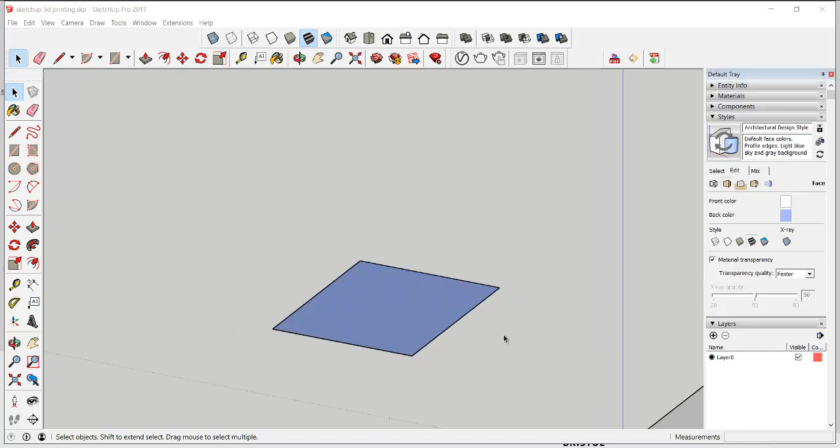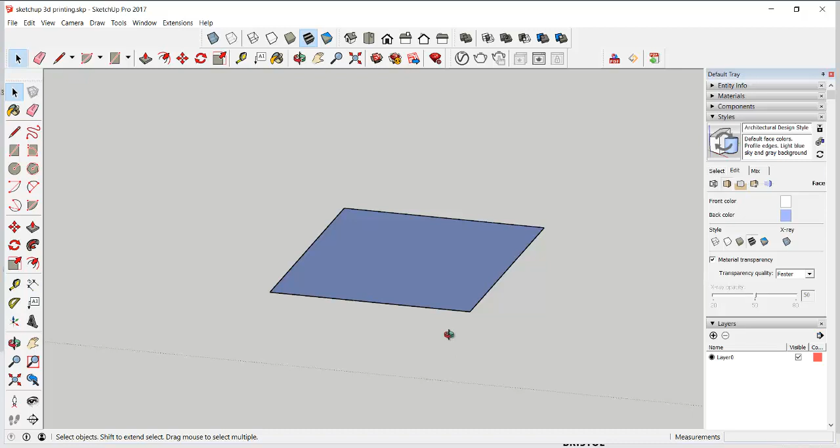One of the first things to realize in SketchUp relating to 3D printing is that surfaces have got two sides. They've got a white side and a grey side. Now, when making a model, it's often easy to get some of the objects white facing outwards, some grey facing outwards. Of course, you can't see this once you've started applying materials. But for 3D printing, it's very important. So one thing I want to show you is how to look for these problems.

So here's the cube, and just to demonstrate, if I delete the face off it, you can see inside, and I've got a slight bluey grey finish. Now I find it very difficult to see the difference between an outside and an inside face when I'm modelling.

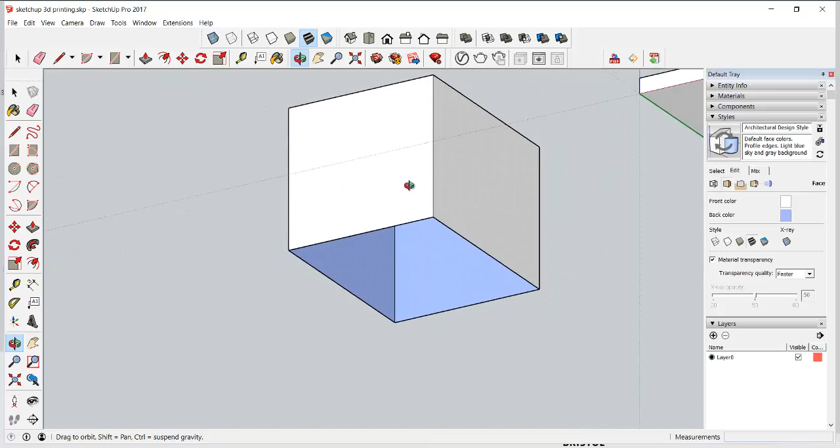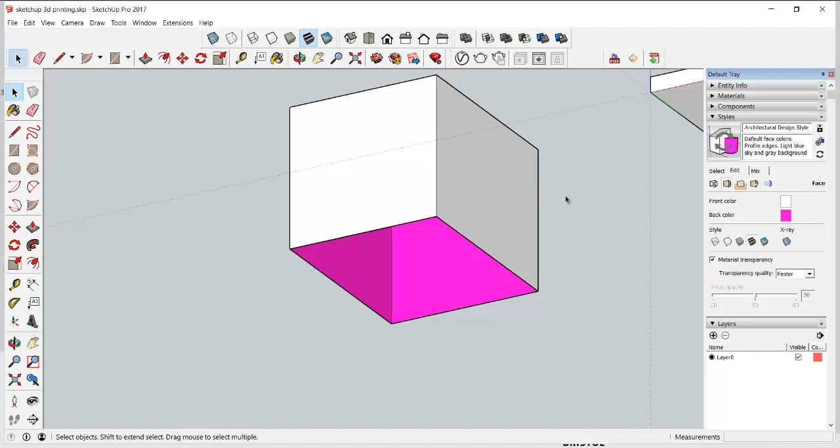And so one thing you can do is go to the Styles palette, go onto the Edit tab and go to Face Settings. The first thing you see is front colour and back colour highlighted, and you'll see this white and grey. If I click on there, an easy thing to do is make that into a bright colour. So now I can really see what's inside and outside my model.

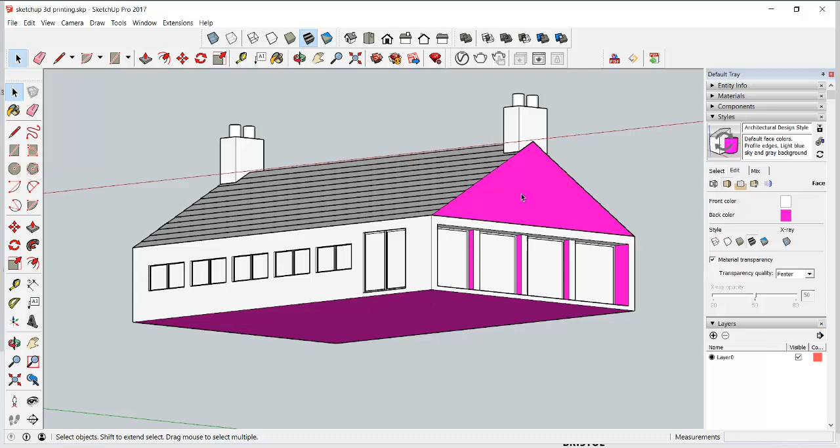Just to reiterate what I'm saying, if I was to present a model to be 3D printed, for instance, this one here, and I'm seeing pink faces, that's not going to print. In the 3D printing software that I have to use to process the work, I would see this as a hole, I would see these as holes, and I'd have a hole underneath. To 3D print, it needs to be solid, it needs to be what's called watertight.

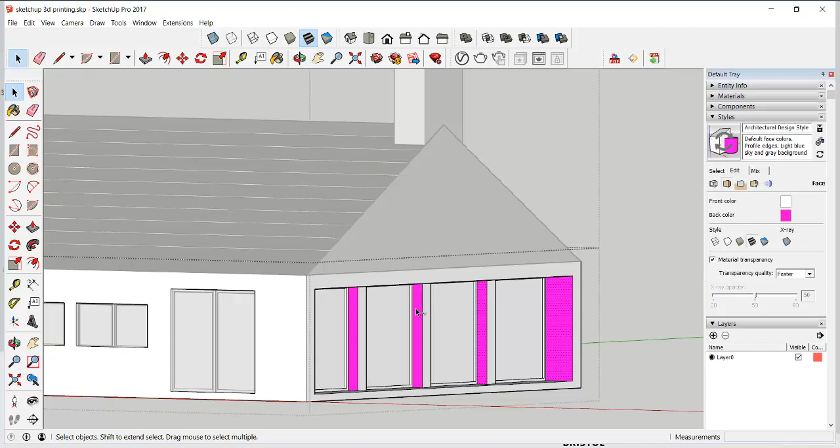So there are some easy fixes. One thing I can do is go into the model, highlight the face that's shown as pink, right click on it and say reverse face. And that works quite well. I can do the same if I want. Holding my control button, I've selected this one. I'm going to select that one, and that one, and then go reverse faces. So you see, it doesn't take too much work to get this model ready for 3D printing. And reverse that face there. Now, I'm going to undo that.

I've got a component here. This component and this component. The same object, I've componentized it and then copied the component. And that's a great way of working in SketchUp. Unfortunately, when it comes to 3D printing, the 3D printing software doesn't understand what a SketchUp component is.

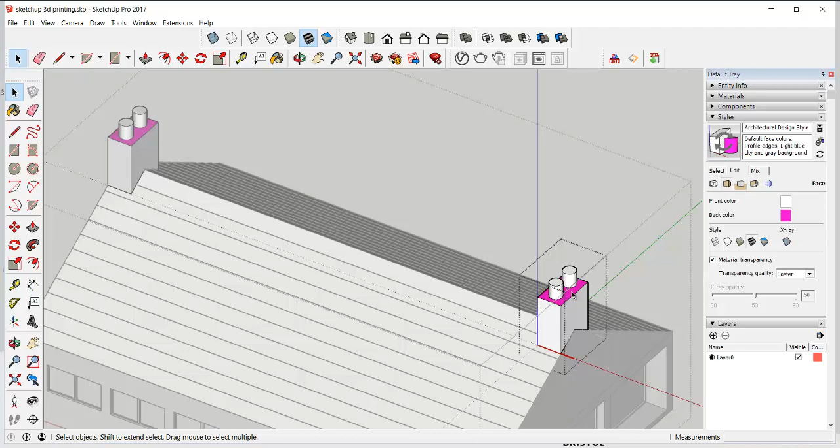So if I make this change here, reverse face, that's great. This one's now fixed. But if I was to try and 3D print this, I would get this object, but this object would be missing. I see this quite often with windows. People make one window and then turn it into a component and copy it a bunch of times across the model. The way to get around this, you can do it one of two ways.

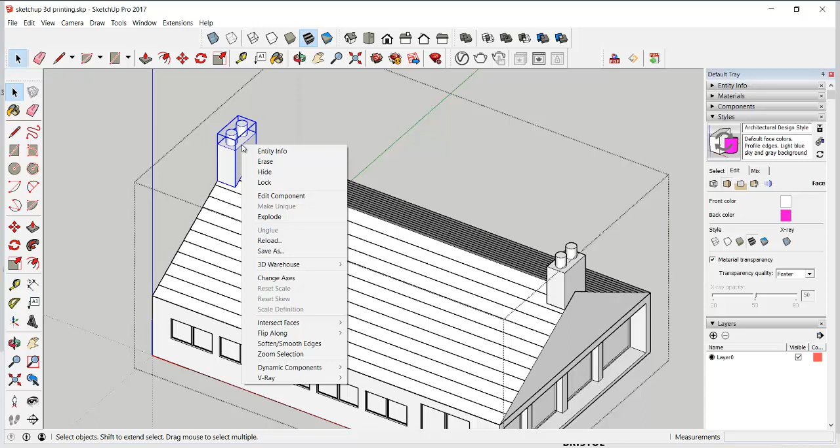The better way would be to make this unique by right-clicking on it. Those two are now no longer the same object. I can make changes to this and I won't see changes here. So that's one way of doing it. The other way would be to just explode the components and turn it back into geometry. That's not quite so good a way of working because you want to try and keep them componentized.

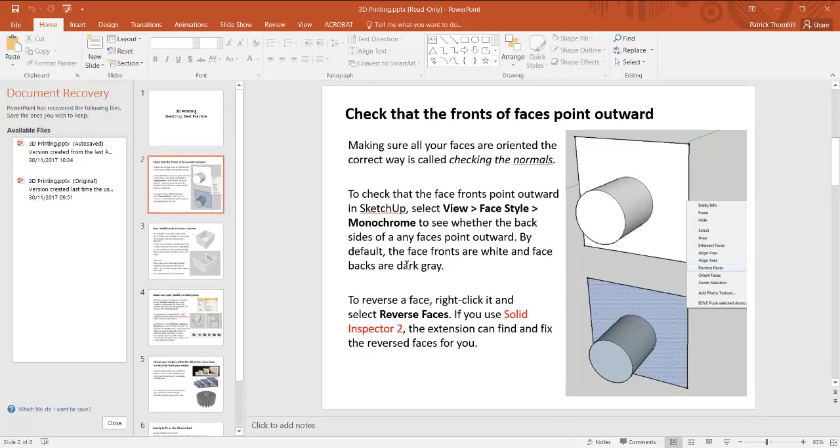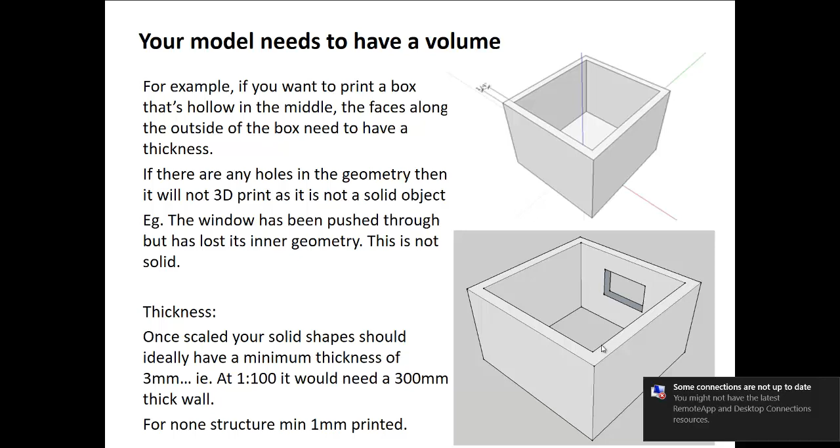One thing to consider when you're printing is the scale that you're going to be printing at. And I'll talk about that again. But if you're scaling down a model and you've built a wall that's say 100 mil thick, and you're coming down at scale of 1 to 200, quick calculation says that that wall is going to print up at 0.5 mil thick on the 3D printer. And that's too thin for printers. So you have to think about scaling down and how big objects are once you get them down to scale to 3D print.

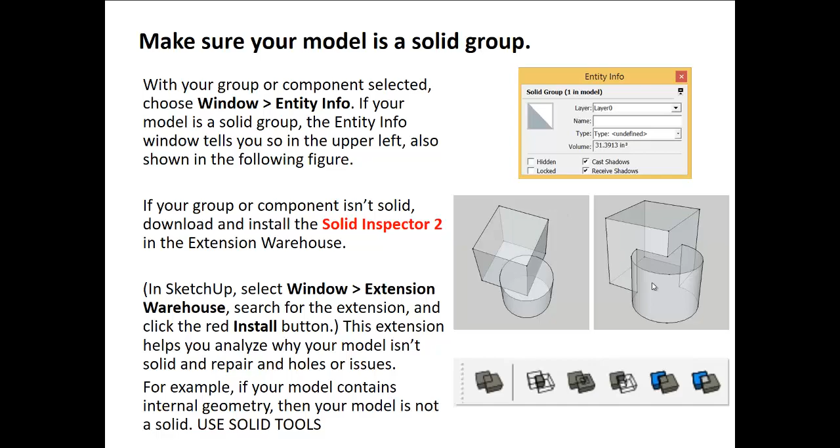Okay, another thing to look at is grouping and solid operators. And I'll jump back into SketchUp to show you this again. But using the solid tools, you can join components together. I'll quickly jump back into SketchUp and show you this.

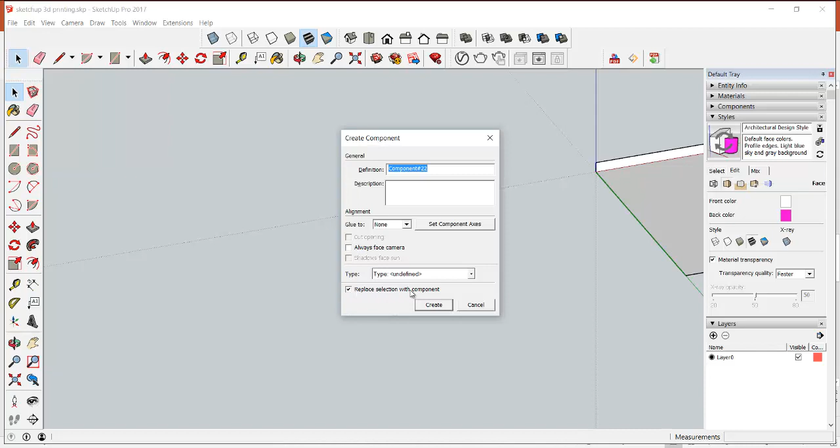So let's make this back into a solid object again. There we go. Now I'm going to select all that, hit G on my keyboard to create a component, make sure that that's ticked on, replace selection with component. So that's now going to create a component for me.

Okay, that's seen as one object now when I select it, and that's a great way of working, so I highly recommend that. I'm going to make another object, push that into 3 dimensions, call that a component as well, hitting G on the keyboard to create a component. Okay, so I've got 2 components.

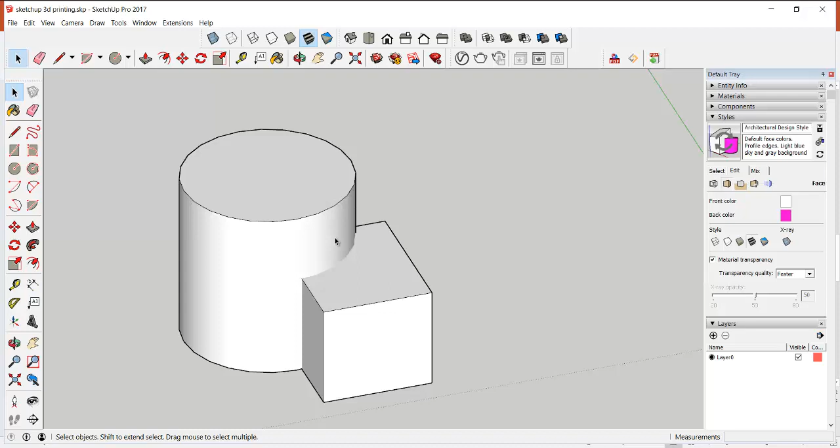Now, for instance, say I wanted to print these 2, and I'm going to move that into that object there. Now, if I was to select that and turn that into a 3D printing file, it might work, but it might not work. I've got geometry inside of geometry. If I change my face style to X-ray, you can see that I've still got the box going inside of the tube.

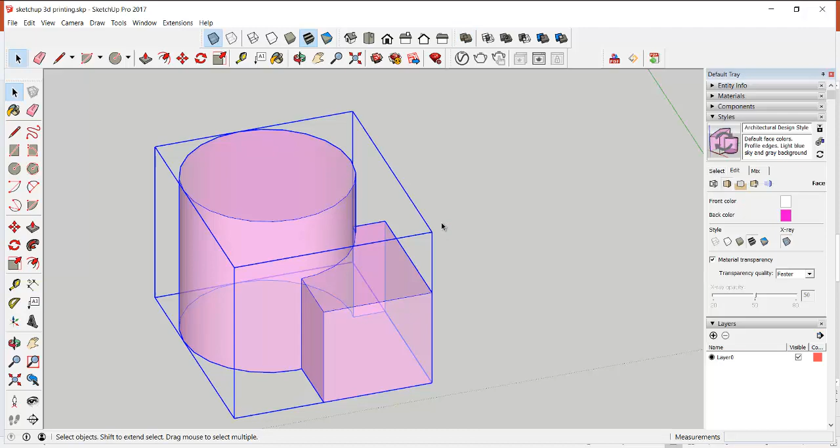So if I wanted to be ultra neat about doing this, I would use something like this, an outer shell tool. So this is under toolbars and it is under solid tools down there. So you can turn that on. And what this allows you to do is select one component and glue it to another component. There you go. That only works if they're watertight components, if there aren't any gaps in the geometry. So now let's remove the inside of there. And that helps the 3D printing software process and work with things.

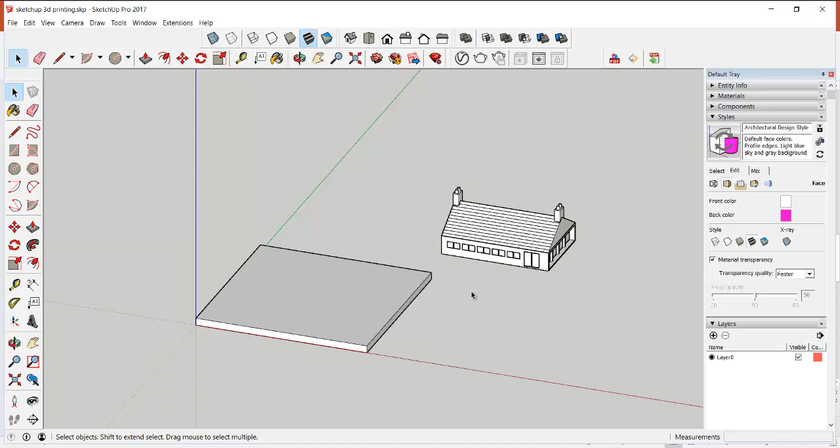Okay, if you're doing the IT for Design module at the moment, I'm just going to change this face style away from X-ray. You'll probably recognize this 100mm by 100mm with a small building on the top of it. Now, one thing I do ask people when they're printing is, do you really need a base on it? I would recommend cutting this out of foam core or making it on the laser cutters and then gluing or placing down your 3D printed building on top of it. But that's just because we get a lot of jobs through, and that will save 2 hours off the build time. So I'm always trying to make savings where I can.

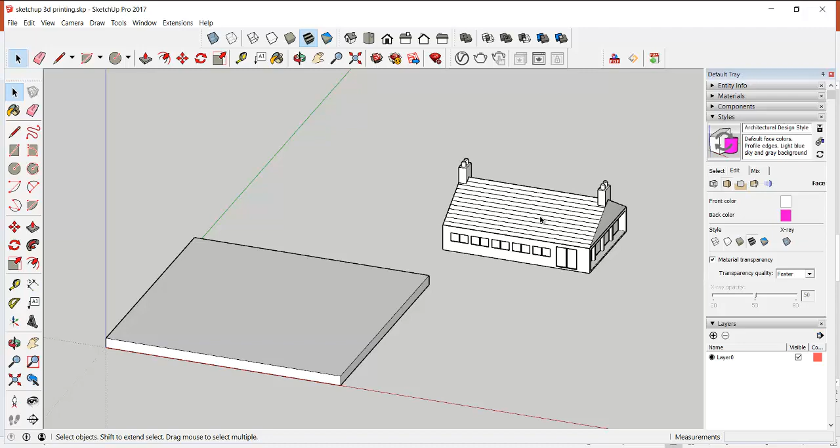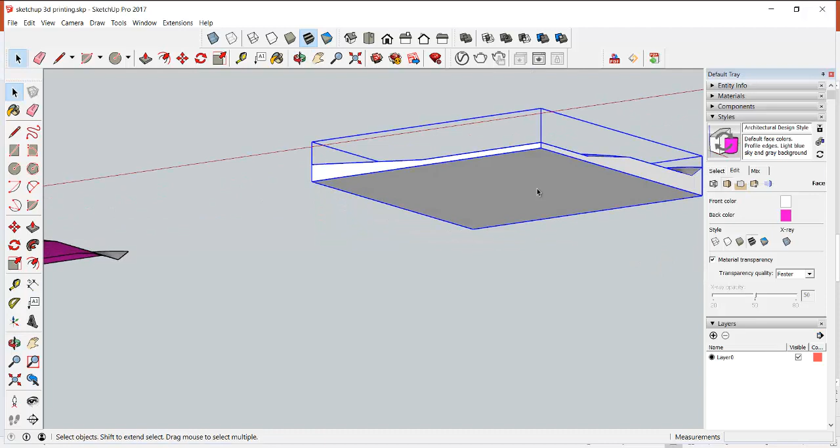However, I am aware that people like and do terrains. So here's a terrain that I've made. As you can see there, it's pink on the underside and it's white on the top side. I don't want any of this pink showing in my final model. So I've worked this through by drawing down, choosing one of the corners, drawing down, and then drawing down to meet up, and then making sure that that is closed off.

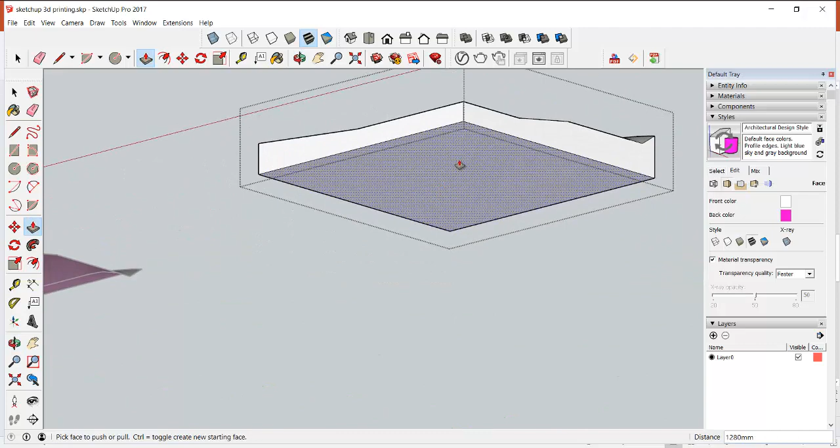One thing that helps with 3D printing is, so I pull this down a little way, make this base a little bit fatter. That was looking quite thin. The thinner the base, the more likely it is to warp. We do have some warping issues on the 3D printers. There's not a lot we can do about it at the moment, so I'm trying to find ways around this. One of the ways I've found around it is to reduce the amount of plastic that's actually sitting on the bed of the 3D printer.

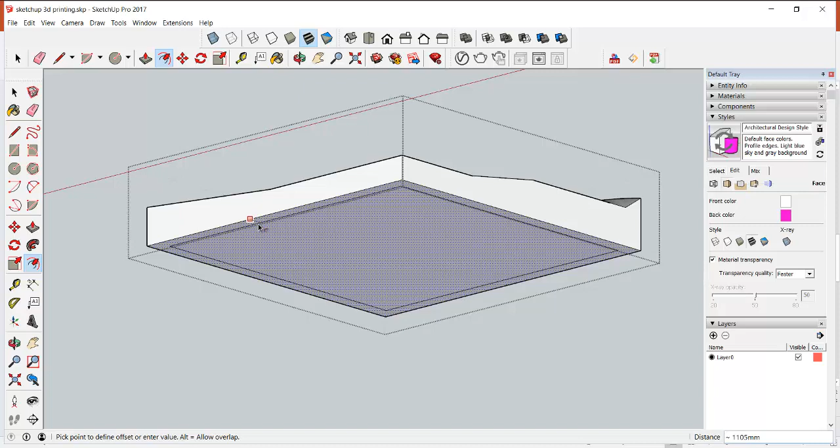To do this, you can do something like an offset of, at the moment this isn't scaled down, but if it was scaled down, that would be about 1 millimeter. And then pushing back up in, just a little ways, but that takes the majority of the geometry off the bed. You're leaving a very small piece of plastic touching the bed there. It'll have support material underneath when it's printed, and I'll talk about support material in a minute. But that I'm finding is helping. So I can recommend doing that to your models.

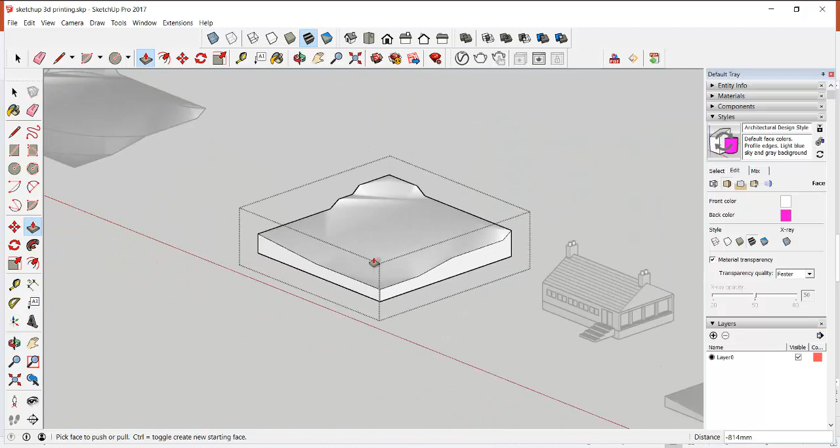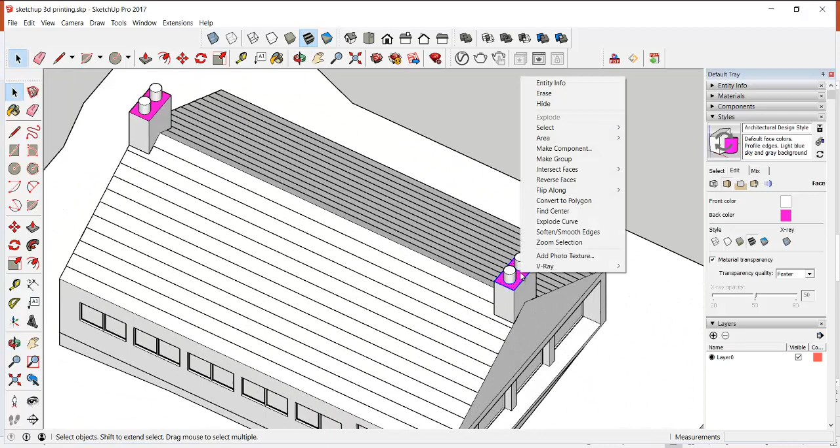How I've put these together is I've made sure that all of these objects are watertight, as I mentioned before, and then I put the terrain together into this model here. Now this will 3D print nicely. I've still got these issues here, which I can reverse face. So keep checking that you're not seeing any of the bright color coming out in your model. Otherwise, you'll have holes in the model and it won't print properly.

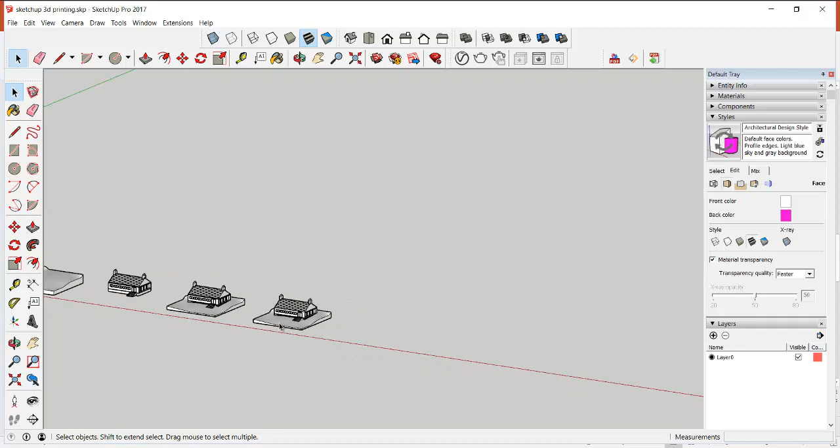Okay, there are a few other things just to take into account when you're modeling, and then I think that'll be enough for you. One of them is this. I'm going to jump back to the PowerPoint and I'm going to talk about support material and overhangs.

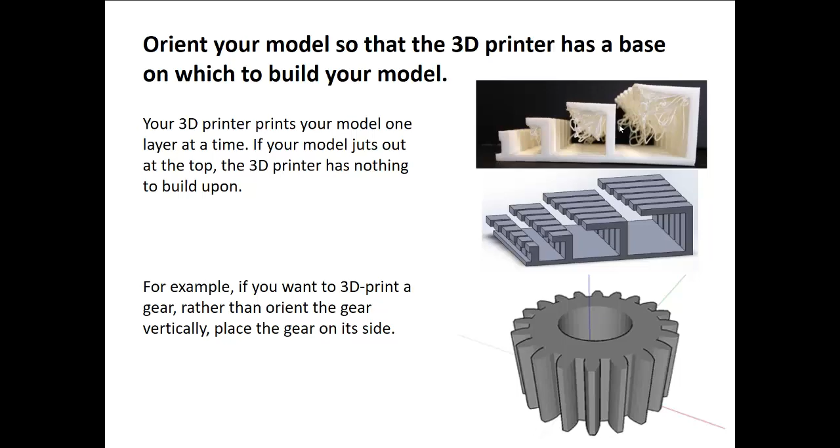So our printers will print a looser, easy to break out material underneath the material that we actually want to print. And if we haven't got support material turned on, this is what happens. You just end up with a failed model. So support material works in that way. Now, when you're modeling, I'm going to jump back to SketchUp again.

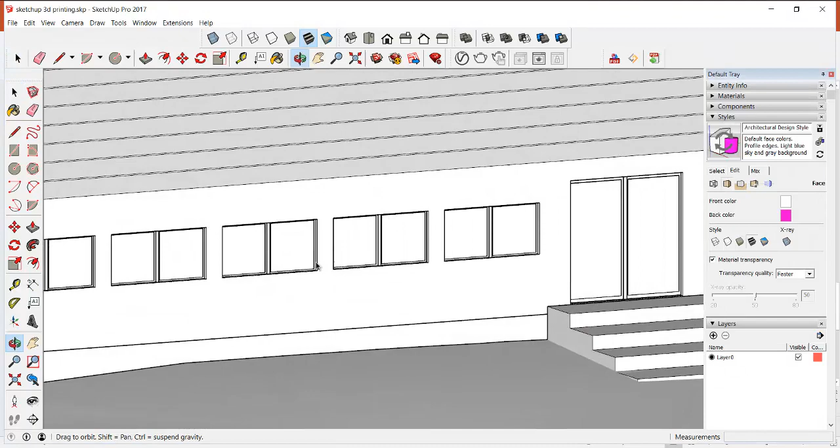Certain features on your model will print cleanly and certain features will have support material. As you can see here, if I was to print this from the top, pointing downwards, all of this material would be fine. I can't see inside my model. I've put windows that are closed. If these windows were open, then you'd see inside and you'd see all the support material that was used to help print the roof. But this feature here, underneath here, there is an overhang.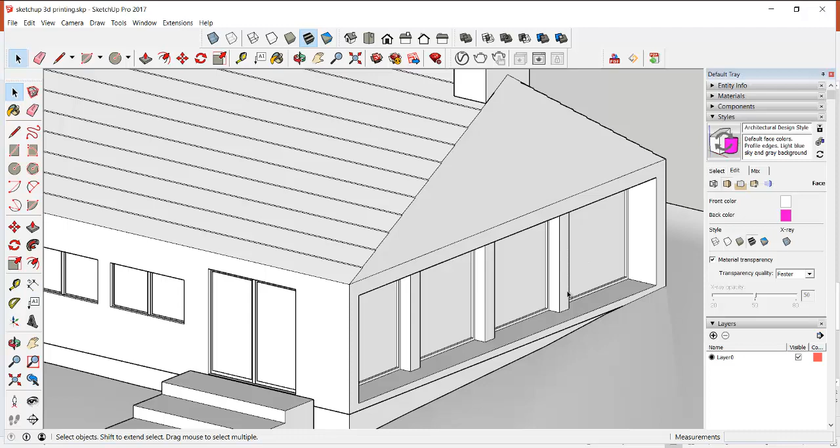That would have support material underneath it, which you'd need to get into with a scalpel or a set of pliers to pull out afterwards. And you might not always have the cleanest surface left behind. So that's to be taken into account when you're modeling. If you want more advice on that, come and talk to one of the technicians about it. But it can make you rethink how you want to print your model.

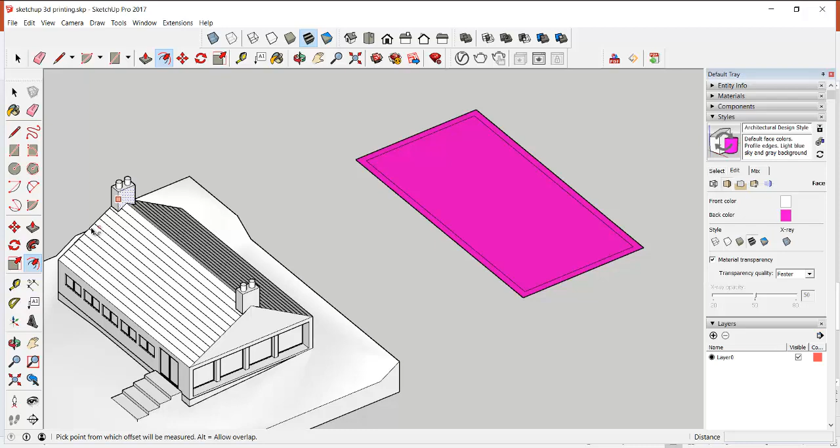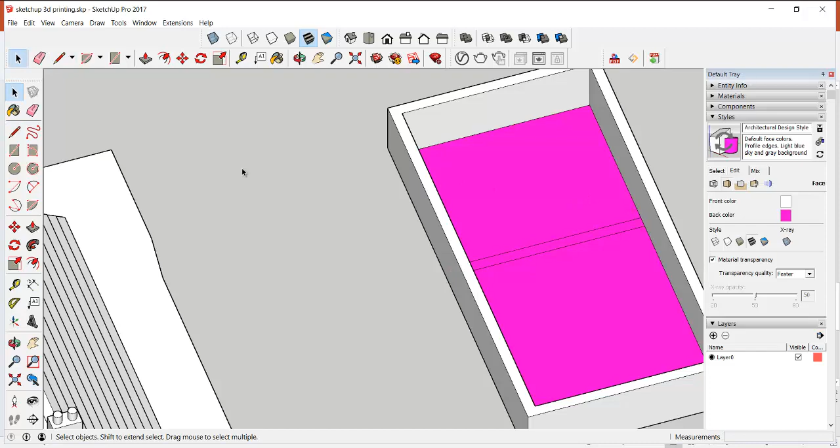I'll draw a very quick model on the ground, offset in here, pull up, etc. If I had an interior to this building that I wanted to show off, if there are some internal walls and features, then you're not going to see any of that in your 3D print because you're printing the outside of your building. By the way, if I do get this inside face, I can just reverse all of those faces to get that right there.

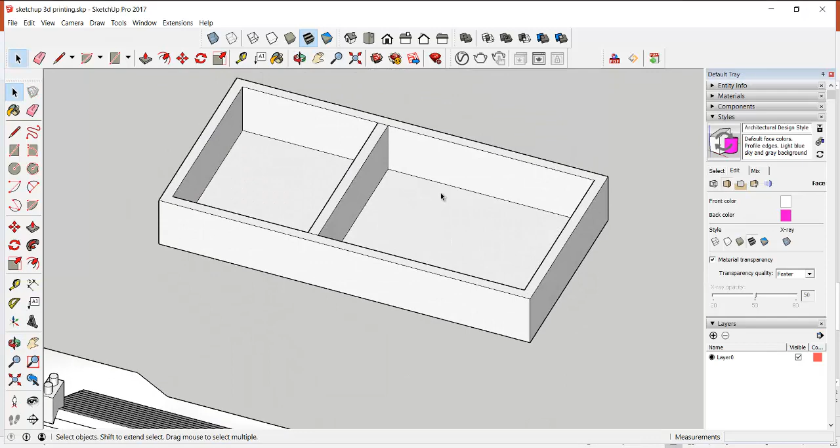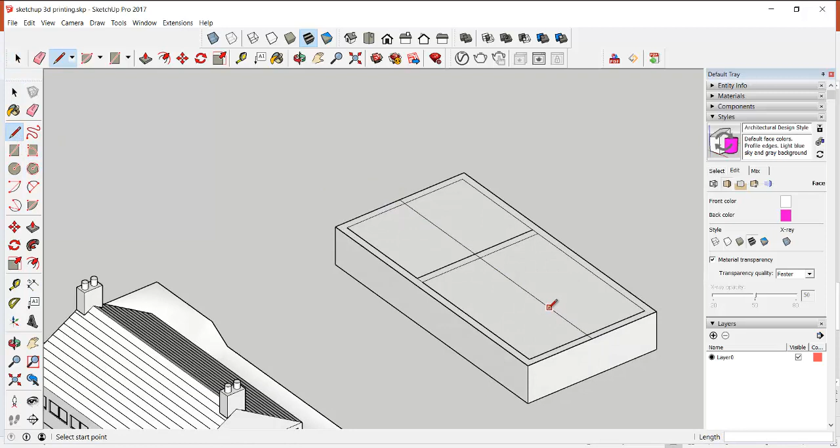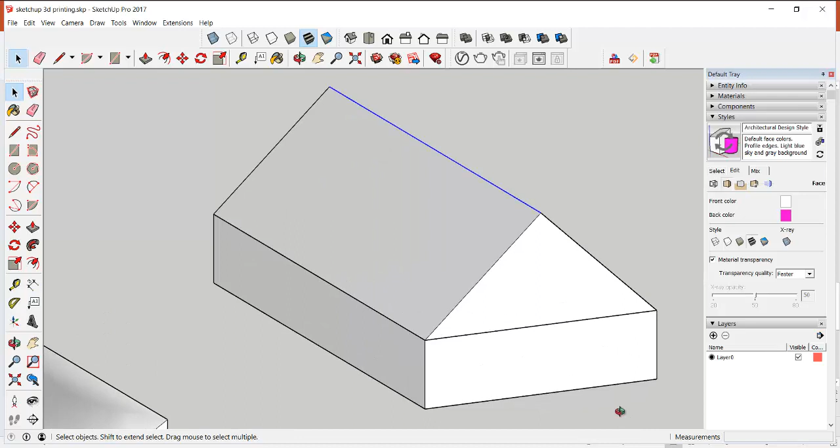So if I had an interior there and I wanted to show it off, one way of doing this would be, I'm going to group that up, to simply think about doing a model that was in two parts, where I might build a roof object like so. Now, I would then submit two files. I would have this one and that one, and I would submit them separately as two different STL files.

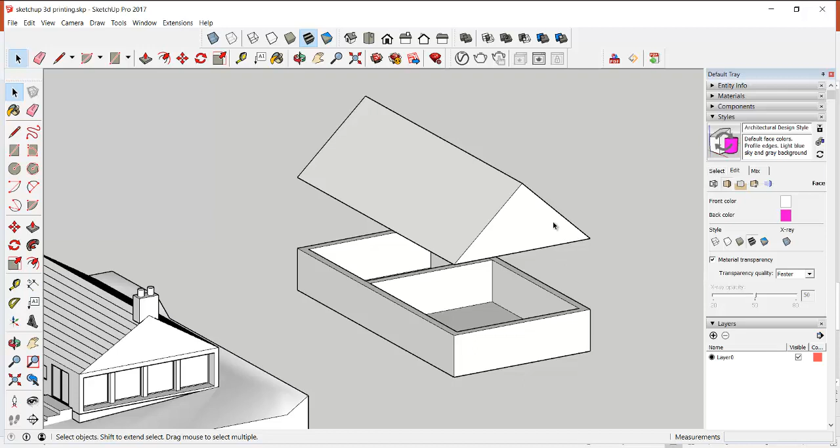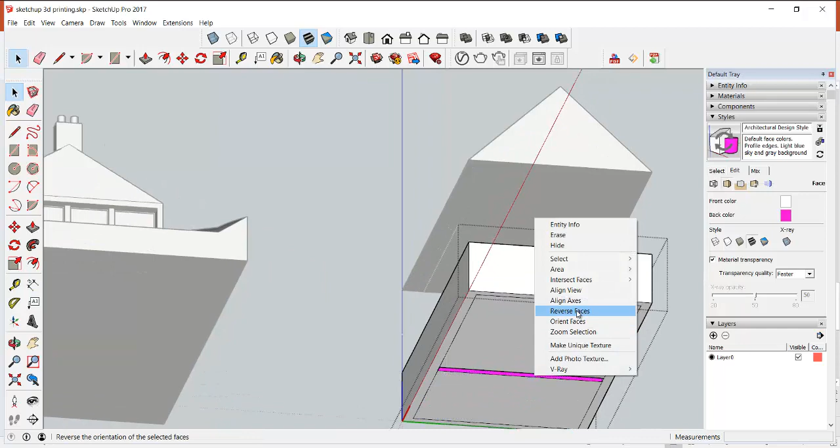I'm going to talk about STL files in a moment, but it's STL files that the printing technicians need, and we need to have them separate so we can orient them on the bed of the 3D printer to be efficient and to make sure we get the cleanest of prints possible. So that is one way of thinking about your model. Of course, this is still invalid because I've got pink faces showing. So a bit of neat and tidy care is needed. I need to extrude those up actually.

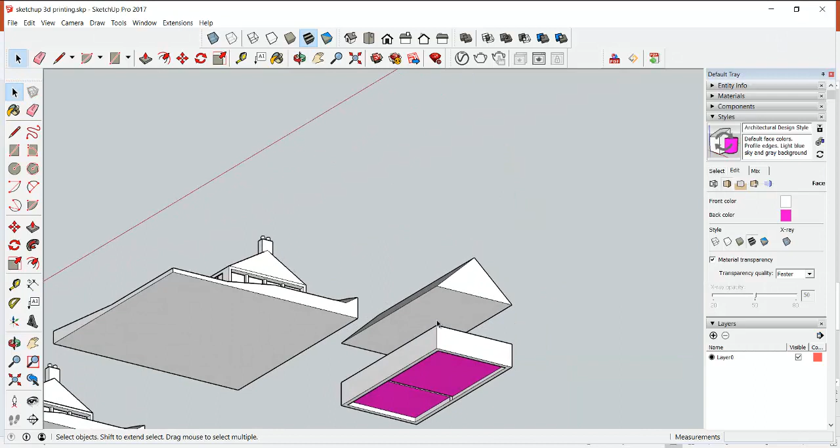So you get the idea. Those two there, reverse. Okay. Aha. Still getting problems underneath. Sorry, building too fast. I need to go slower to do this properly. There. Okay, that's now a legitimate model that could be submitted. So how would I go about submitting that?

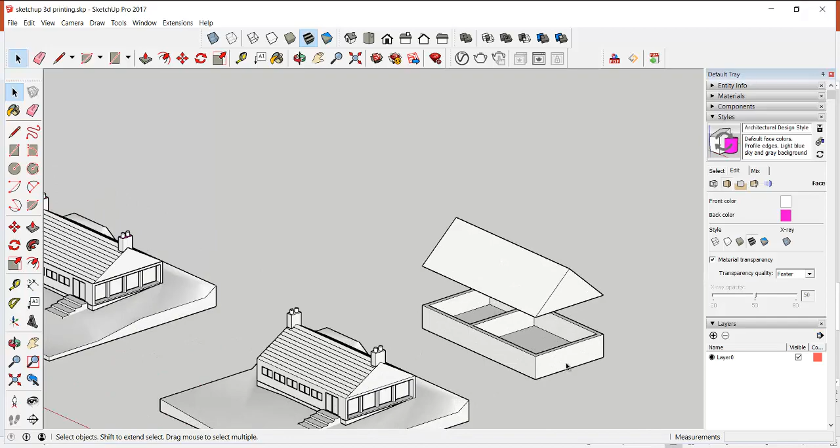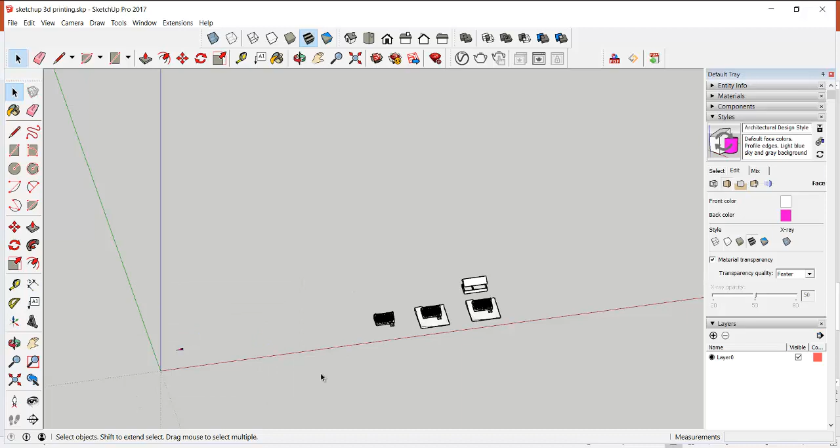First thing I'd do, before anything with SketchUp, there's a particular issue, and that is with hiding objects. If you've got any hidden geometry, so for instance, say I took that and I hid it. Can't see it, that's fine, you might forget about it. But if I was to essentially delete everything off and just have that as what I'm going to submit, if I do that, there we go. Okay, so I'm thinking, great, I'm ready to do my work.

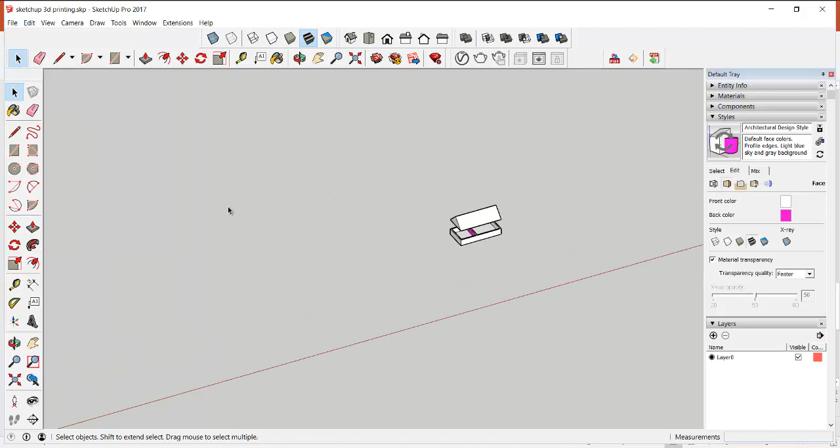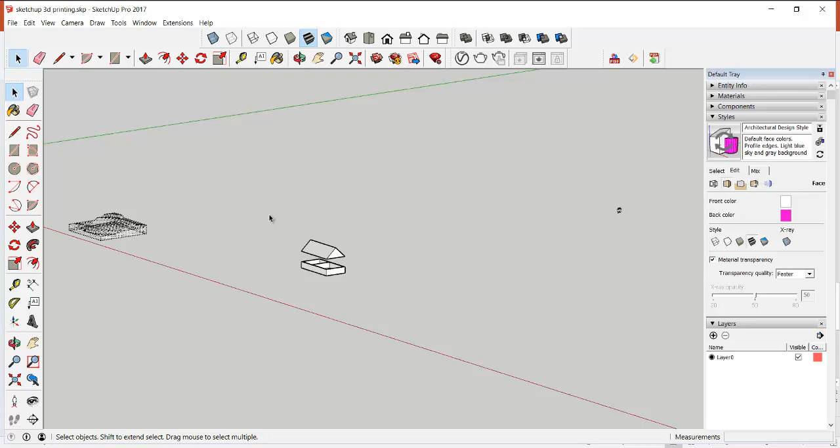If I then saved that as a SketchUp file or exported it to a website, the hidden geometry will go too, because only SketchUp understands SketchUp hidden geometry. All other pieces of software will see the geometry is really there. So before you export, check that you haven't got any hidden geometry within the model, because this is what I would get. I'd get both that object and that object in the STL file, and I won't be able to do it, and I'd have to email you back. Okay, so checking for hidden objects, there and there. Okay, now I've got this.

As I've said, there are lots of websites that you can upload SketchUp models to, which will convert them into STL files. There are quite a few, or you can get plugins if you're using your laptop and you have administrative rights. However, if you're at UWE, a quick and easy way to do this is to save as, and I drop this back to SketchUp version 8, and I'm going to just drop this onto my desktop so I can find it again.

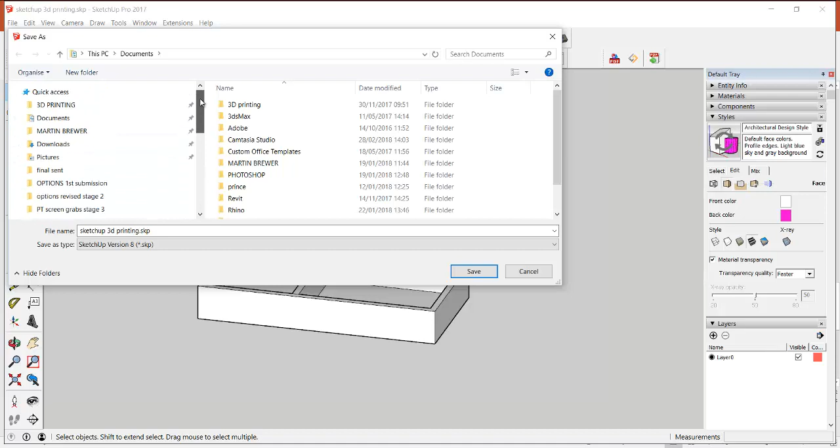I'm going to actually put V8 in the title.

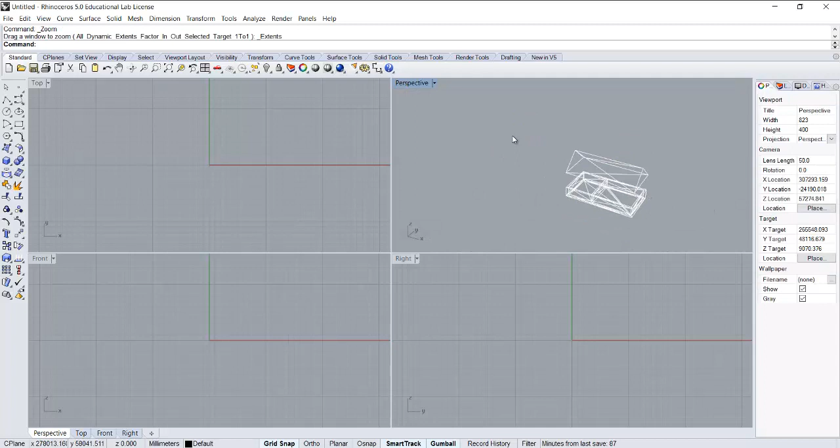And then I jump over to Rhino, which is installed on all the machines at UWE, and you can get a copy for your own laptops at home if you go through IT. But what it's very useful for is importing... it's got to be an old version of SketchUp, so that's why I'm saving it back as SketchUp version 8. But when I open that, bring that in, and there it is. So it can bring in SketchUp models quite easily.

All I need to do then is select what you want to export, File, Export Selected. That's a good one to use rather than Export with Origin. Export Selected just grabs the geometry that you need.

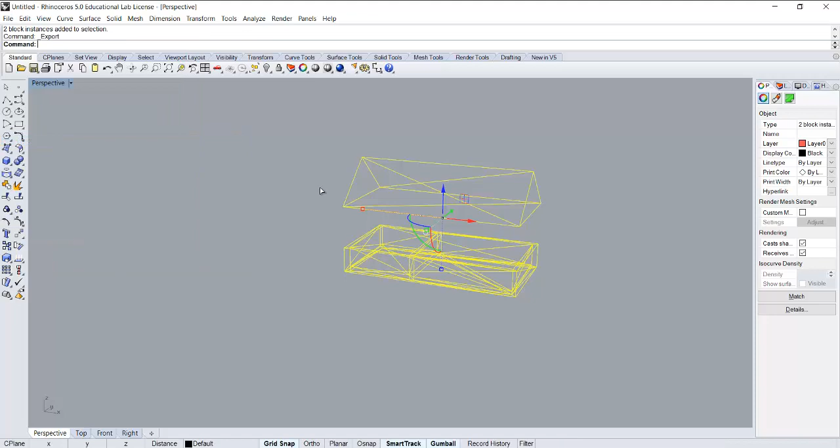And you're going to change the export type to a stereo lithography or STL file. That's the file format we need it as technicians in. Give it a name. I'm just going to call this test, but be descriptive. Put your name in the title as well. More often we've got a copy of whose file this is and what it's for, so you might want to put your module title in there or something like that, just to give us a real clue as to who owns this model and who should get it back. So I'd hit that, hit save, and that will export an STL file.

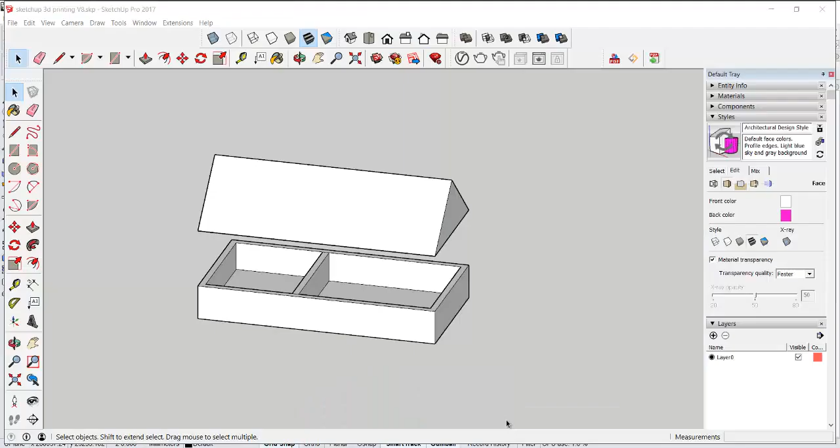Okay, last thing to talk about though is scaling. Now, jump back over to SketchUp. Scaling, you'll be working at a 1:1 scale in SketchUp, hopefully. You should be working at a 1:1 scale.

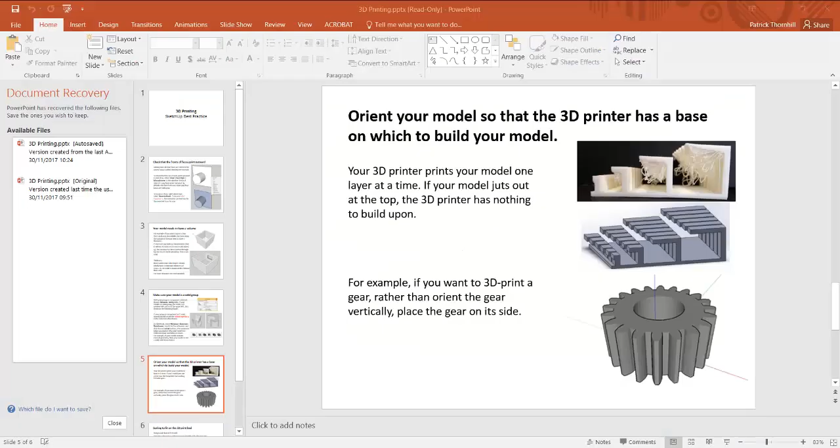However, I'm just going to change that. There you go. However, our 3D printers are small and you need to submit this STL file at the correct size. We can't scale it down for you. You need to do that thinking yourself. So I've done a handy chart on my PowerPoint. These are the scale factors to come down in size from a 1:1 model to these different scales. We quite often see 1:200, so that's a scale factor of 0.005. So I'll use that as an example.

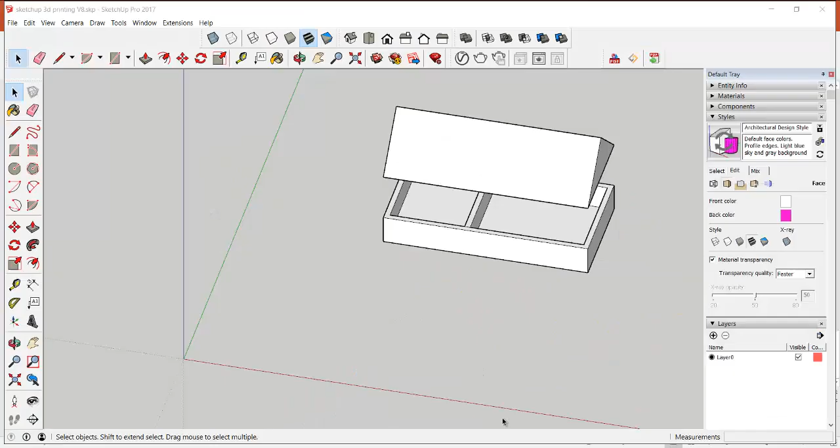So back in SketchUp, how do you do that? So to scale this down to 1:200, I'll select it, use the scale button, grab one of the corners, start moving, and then type 0.005. You can see in the bottom right hand corner of my screen, it says 0.005, then I hit enter. Now I've got a very small object. Do extents again.

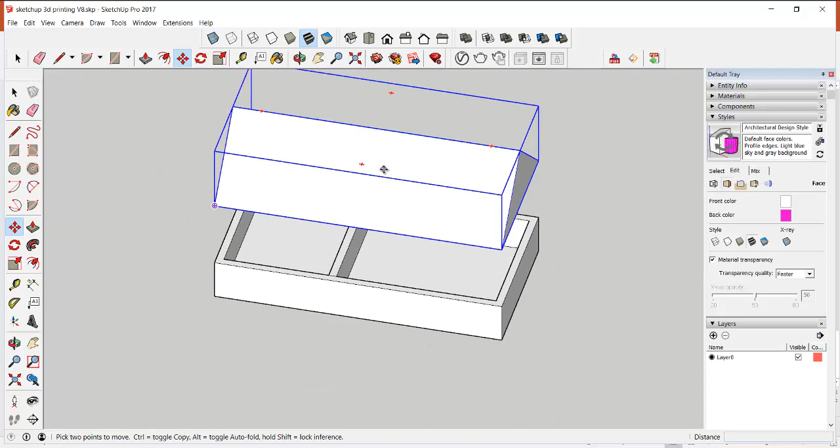Okay. What's useful is if you put that near the origin, and just to check, I'm just going to jump back. Okay, here's the information here.

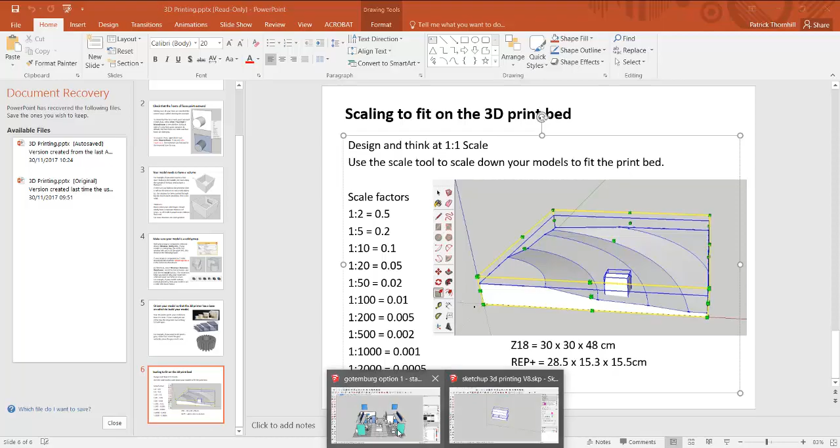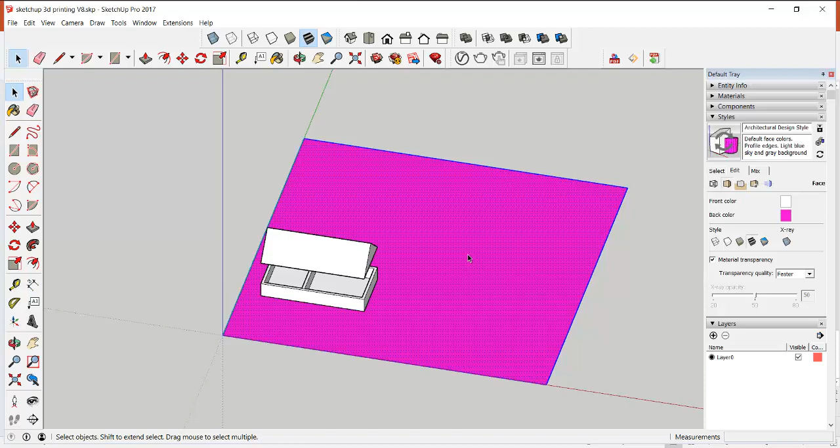But let's say we're working with 30 by 30. So handy tip is draw yourself a 300 by 300 millimeter square. There you go. So that's my printer bed. I know that this is going to fit on it. So it's that kind of thinking we need you to do first before submitting. Please don't leave that in the model because you'll end up with a big flat base. So, but that's the thinking you need to do.

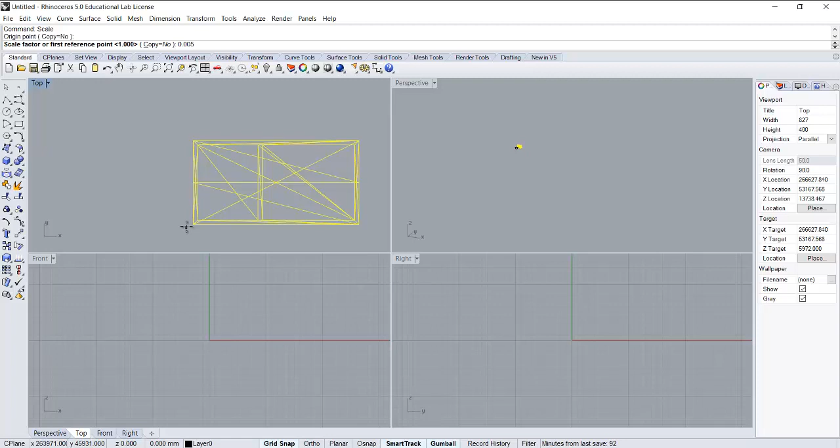Now it's scaled down. However, you can do that in Rhino. Same thing. If I select this to scale this down, same operation really. Select the model, type scale. You've got a few scales in Rhino. You've got scale 1D, scale 2D. Just go for scale, which is the scale 3D. It asks for an origin point. I put that there, and it says what scale factor you want to use. So I'm going to go 0.005 again, same as I just did in SketchUp, and I get exactly the same.

So now I can select that, go File, Export Selected, and choose the STL format, Stereolithography, STL, and export it like that.